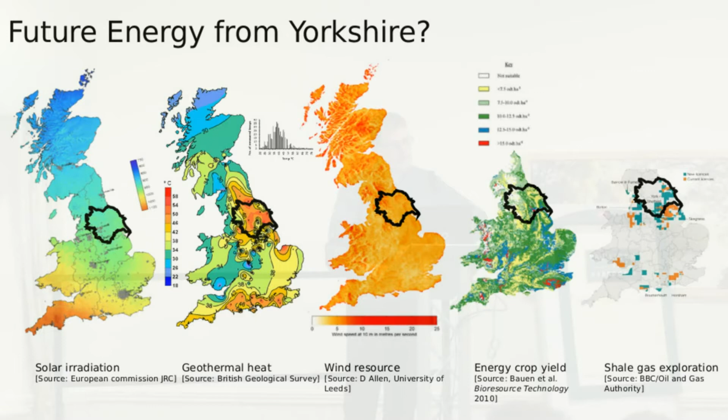And then perhaps the more controversial issue of the evening is going to be talking about shale gas, because we have significant, or potentially have significant, shale gas resources in the region. Whichever energy source you prefer, it's certain that someone disagrees with you. So this slide is there to illustrate that whatever you choose, it's going to upset someone.

We're going to talk about energy in relation to Yorkshire - that's the theme of this evening. But when it comes to wind, just be aware that that is a national resource.

In the UK, we have more offshore wind installed capacity than any other country globally. We've got about 5 gigawatts at the moment. Germany keeps threatening to overtake us, they're not quite there. We're world leaders in terms of offshore wind, and why is that? Because we've got this great asset called the North Sea.

I'm going to talk specifically about wind energy tonight, and so we better talk about, for those of you who haven't been involved in the industry, what a modern wind turbine is. So here is my attempt in one slide.

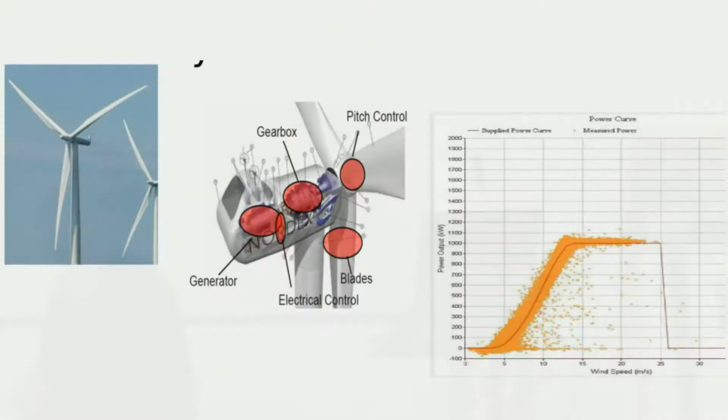How does it work then? Basically they all have a power curve like this. This is a 1 megawatt turbine, power here on this axis. This is wind speed, 10 metres a second, 15 metres a second. At low wind speeds, you need to get up to about 5 metres a second before the turbine starts to do anything. It then starts to generate, producing increasing amounts of electrical output power up until about 13 metres a second, and then you start pitching the blades, turning them to restrict the amount of power it produces to keep it at a megawatt, so that you don't overstress the whole system.

And that's okay up to wind speeds of about 25 metres a second. Once you get beyond that, the loads on the structure are getting so great that you really don't want the blades going around at all. So you pitch them so that it's generating no power, and it sits there and weathers the storm out.

If you add up everything, all the wind, all the gas, all the nuclears, you've got about 80 gigawatts of electric power generating plant in the UK at the moment. Peak demand is something around 45 gigawatts typically within a day.

Okay, how much of that could we generate from wind? Well, there's about 8 gigawatts of onshore and 5 gigawatts of offshore wind. That is set to rise massively in the next 5 to 10 years. And it's cheap. Already, you can generate electricity at £65 a megawatt hour from onshore wind turbines. That's typically the number. If you remember Hinkley C, when the government fixed the electricity price from that, £92.5, over a decade's time before anything's going to come out of that. So already onshore wind is about 2/3 of that cost.

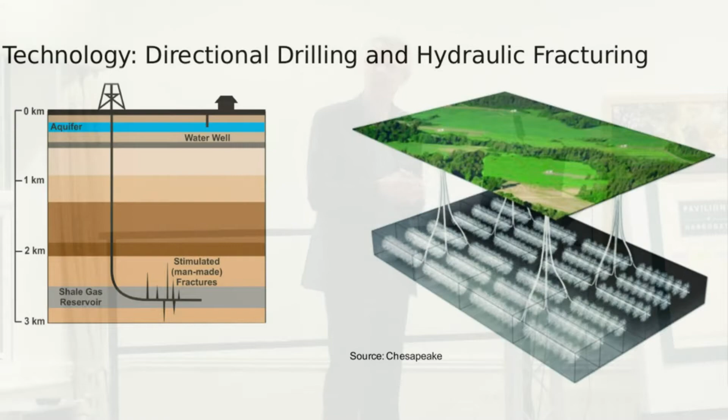The fracking technology has been around for a long time, at least since 1940. What this is, basically, is injecting high pressure water with sand and some chemicals in order to create little fractures and increase the permeability, the rate at which gas or oil can be produced from these wells.

The real breakthrough has been applying this with directional drilling, and that's really the key thing. Not to scale here, but these wells typically go at least 1 kilometre, typically 2 or 3 kilometres underground, injecting the high pressure water and sand, and you are cracking the rock apart. The way it works best in the US, which is basically where all the action is, is to drill multiple wells from one site.

So that's what it looks like during the drilling process. There are water tanks here. A few million gallons of water are used for each frac. That has to come from somewhere.

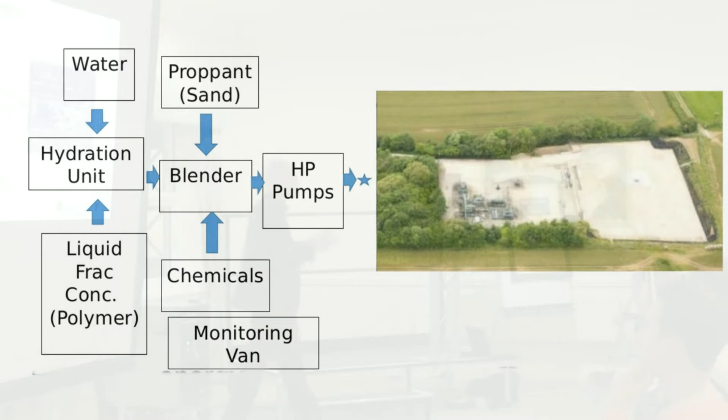Here in the UK, we might be able to pipe that in. In some places, it's stored. There's some polymer sometimes added. There are some chemicals, small amounts of biocide, for example. There is sand, because what the water does when you create those fractures, you want to prop the fractures open. You don't want them closing up, and they do close up actually quite quickly, which is quite a big issue.

So that's actually what it looks like, and of course you need a lot of pumps, so you need some pretty meaty pumps in here in order to pressurise that water. So then they need to be on site for the appropriate period of time.

How long does it take to drill one of these wells? Maybe something like 6 months. If you're going to drill multiple wells from one site, so 6 wells, that might be 2 or 3 years. So that's the kind of time period you're talking about for drilling. And of course, that's the great thing about fossil fuels: the energy density is so high, so the surface footprint for the amount of energy you get is extremely small.

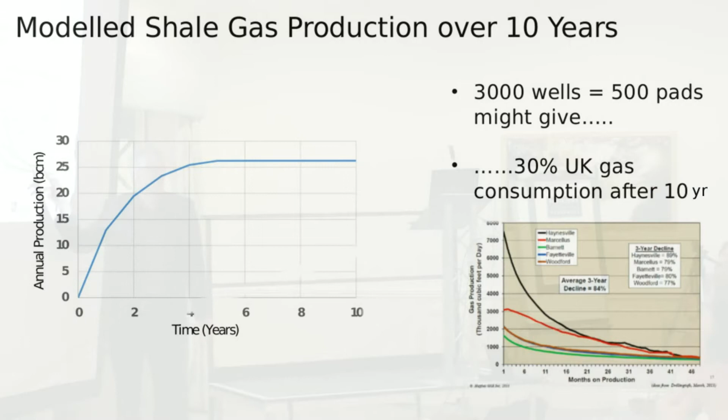These are the kind of production profiles you've got. You can't read this, but this is from 1 to, I think, 48 months, so this is the 4-year production. The issue with these wells is that the rate of gas production declined very, very quickly - after 3 years, you've lost about 80% of your production rate. Economically, that means the companies have got to keep on drilling.

So if we drill 3,000 decent US wells over a 10-year period, and I've suggested maybe that would be 6 per pad, so 500 pads, 500 football fields, that's what it would look like at the end. And if they work like decent US wells, not the best, not the worst, but sort of decent ones, after 10 years that would equate to about 30% of our annual consumption of gas. So that's the kind of potential prize which is actually out there.

We've gone from self-sufficiency to 80% import over about a 15-year period. So this could replace some of it if it works and we go on to that kind of scale. So those are the numbers, those are the issues that we need to talk about.

Biomass? Well, actually biomass covers a really wide range of materials. Essentially all biomass is either living or recently living matter on the surface of the earth. So that mainly includes, in terms of what we use as an energy resource, mainly wood, but of course it also includes other materials such as agricultural residues like straw.

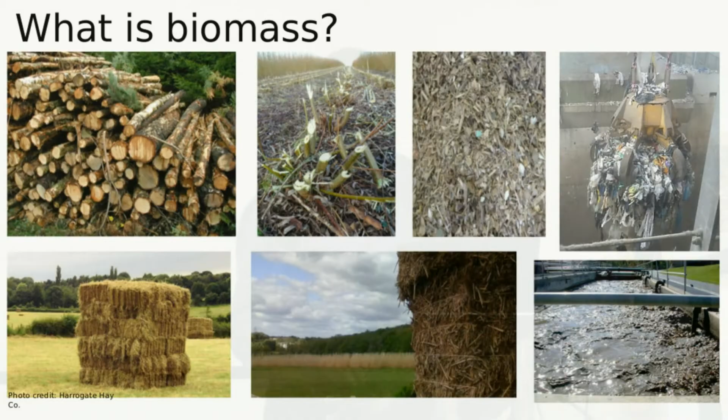There's also materials which are grown specifically for energy purposes, such as miscanthus and willow. But a lot of the stuff we generate as waste materials is also biomass - waste wood, municipal solid waste, which is substantially biomass but also has plastics and petroleum products in it. And sewage sludge is another waste product that's a resource for generating electricity.

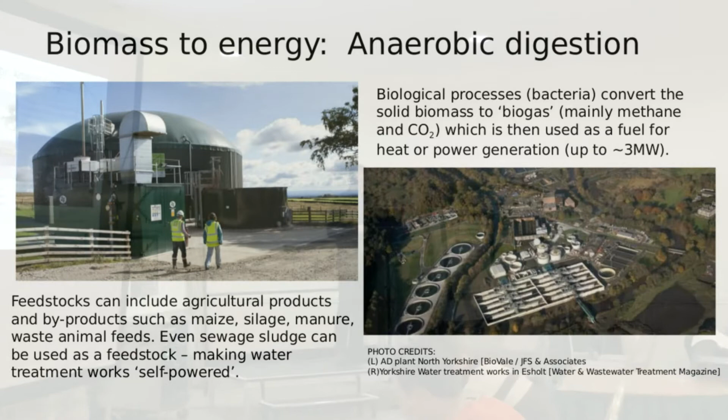So how do we convert biomass into electricity or harness the energy? There's a number of ways. Anaerobic digestion is a commonly implemented means of converting biomass into a usable fuel, using waste materials like agricultural waste, sewage sludge, manure from the farm, waste animal feeds and so forth. In recent years, anaerobic digestion plants have become popular.

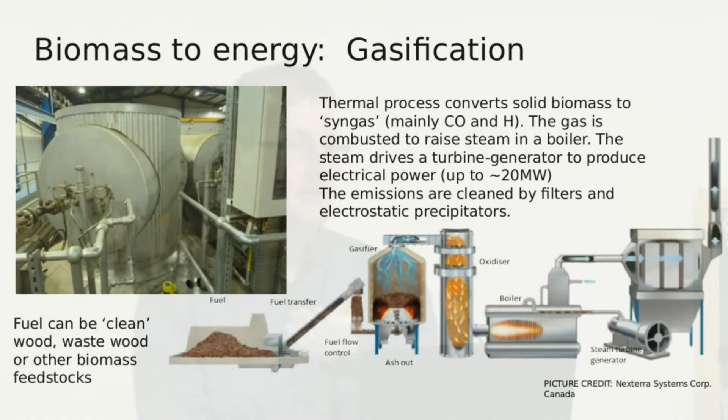Another thing you can do is heat up your biomass in an oven in the absence of oxygen, which converts the material into a different sort of gas - similar to syngas, so carbon monoxide and hydrogen. This is similar to how town gas used to be made from coal in the olden days, before we had natural gas distributed.

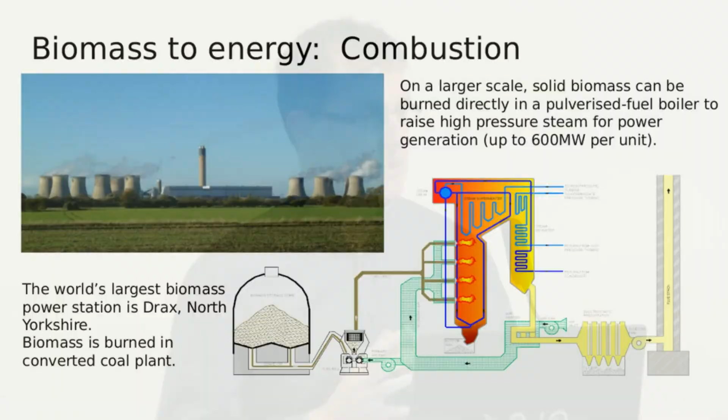And then the really big stuff - you might recognise this picture, it's a power station I mentioned earlier. This is Drax Power Station, the largest in the country, in North Yorkshire. Drax consists of 6 units, each 660 megawatts, so its total capacity is 4 gigawatts.

Large power stations like Drax, Ferrybridge, Ratcliffe and Cottam were built by the CEGB in the 60s and early 70s, based on very similar designs - they were based on burning pulverized coal. To convert them to biomass, they took wood or other biomass, milled it into a pulverized fuel, a fine powder, and put it through the burners in the same way they do with coal.

Why burn biomass? Why not just rely on wind energy? Biomass is essentially a renewable resource - that doesn't mean it's carbon neutral, and it doesn't mean it's instantaneously renewable, but the point is it is renewable. Burning biomass instead of coal is advantageous because it offsets putting carbon that's buried in the ground as fossil fuels into the atmosphere. The carbon emitted when you burn wood does convert to CO2 among other things, but the principle is that the carbon dioxide released is captured in regrowth of the resource you're using.

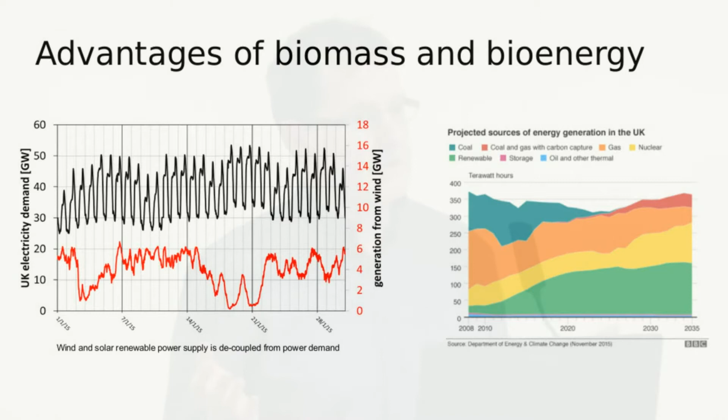If we're using this in the same way as we use coal at the moment, we can use it on demand - the power output from these power stations can be controlled according to what demand is. This graph shows two things: the UK electricity demand in black, which is basically a daily cycle, almost like a sine wave. The red line underneath is generation from wind, and there's no correlation between when the wind blows and when you actually need the energy. The point about conventional power fired by biomass is that you can switch that power on when you need it.

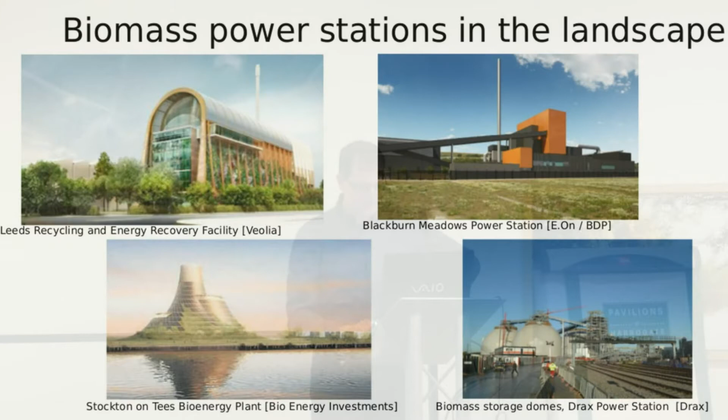What will these look like in the landscape? I've put this slide up to show that power stations don't have to be the brutalist architecture of the past. The one top left is the recycling and energy recovery facility in Leeds, run by Veolia, quite a pleasant looking building with a garden growing up one side. The orange building is in Blackburn Meadows in Rotherham. There's also an artist's impression of a bioenergy plant on Teesside bottom left, and bottom right are the biomass storage domes at Drax. So the architecture of these buildings doesn't have to be as brutal as it was in the past.

That's almost entirely Drax. Where did they come from? They come from North America.

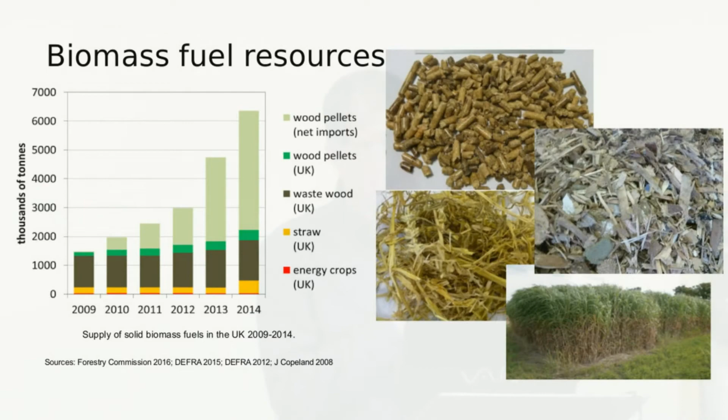But contrary to what may be claimed in recent reports, the supply chain and the means of resourcing those wood pellets from North America is, at least ostensibly, sustainable.

So as Patrick said, I'm going to talk about small-scale heat and power. These are technologies that any one of us in the room could be owners and operators of energy infrastructure. As opposed to the three speakers we've had previously, who talked about centralised, large-scale energy infrastructure, we're going to talk about anything that could be implemented at the domestic or community level.

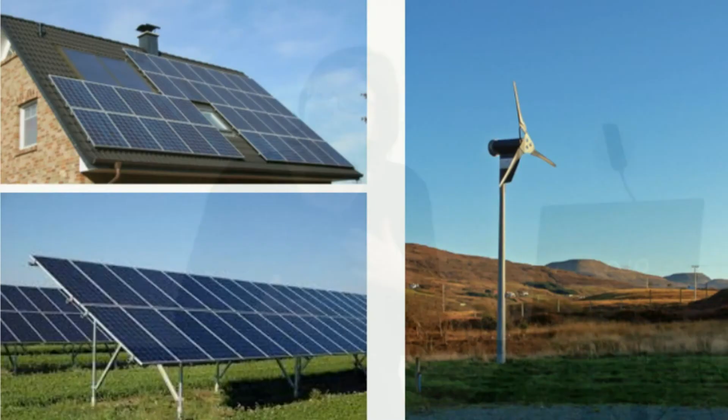On the electricity side, we've got solar panels, either roof-mounted, or now tiles that can be integrated into roofs. Or at a slightly larger level, a community-owned solar farm. At the household scale, you're looking at 4 kilowatt peak systems, and it can also be large community-owned schemes. Wind turbines, but much smaller than the type Simon was talking about, so micro scale here, either roof-mounted, around 1 to 2 kilowatts, or pole-mounted, like the example there, with around 5 to 6 kilowatts.

We shouldn't forget heat. When we think about changing our energy systems, we always think about what can be done on the electricity side, but heat accounts for more than 40% of our energy use in the UK, and also 30% of our greenhouse gas emissions. So if you want to think about a transition of energy systems, we have to think about heat as well.

We do have options for small-scale technologies that offer us heat. We've got solar thermal, similar to solar PV, but here we're heating hot water for use in the house instead of making electricity. In the middle there, that's actually a wood burning stove, but we can also think about biomass boilers, or systems that help us heat our homes, such as ground source heat pumps and air source heat pumps.

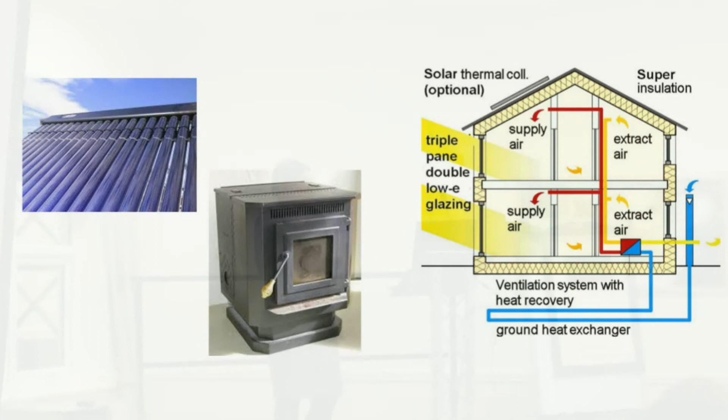So we can start to integrate these into systems in our households, as well as thinking about energy efficiency measures. I thought it'd be worth showing some of the costs and benefits of these technologies. This data I've taken from the Energy Saving Trust.

I've got some data here on costs for different types of systems, and you can see there's always a range. That range is going to be dependent on the size of the system you're able to implement, which relates to things like the size of your roof, or how much space you have if you're intending to put in a heat pump.

Also, the variation depends on what heat source you might be moving from. For example, you'll save a lot more money with a ground source heat pump if you're moving away from electric or coal heating. But if you're moving from a gas central heating system, you'll save less money because gas is quite an economical way of heating your home.

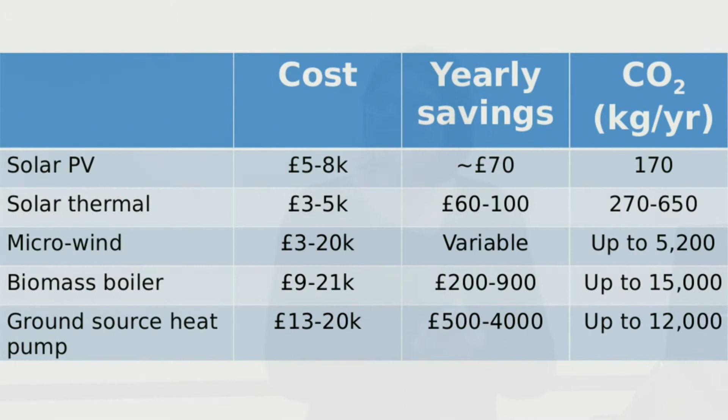We've got some savings costs here, and those numbers add up to payback periods where you're looking at maybe 20 years to regain your investment. But usually if technologies hit around the 10-year mark payback period, that's reasonable. I've also shown here some of the CO2 savings.

I wanted to show this scenario as a particularly optimistic one for what our energy system could look like if we really went for decentralised energy technologies in a big way. This is research from a consortium called Realising Transition Pathways, who were looking at different scenarios for our future energy system.

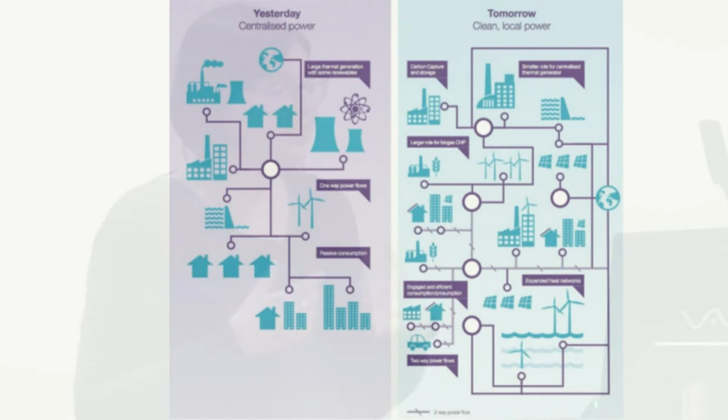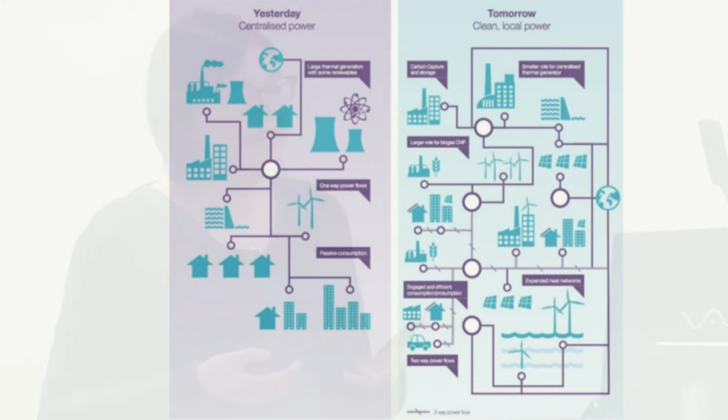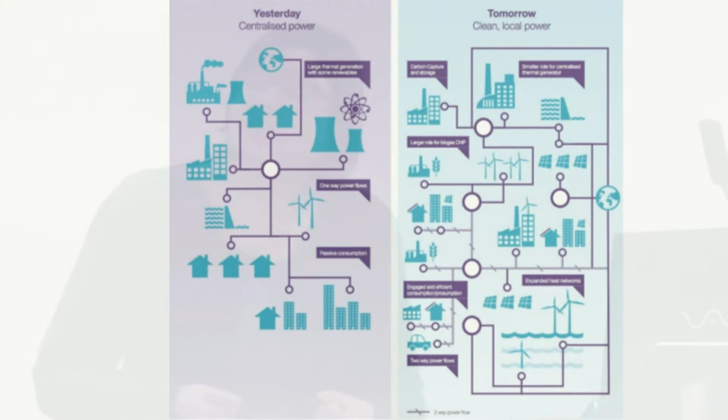They outlined a scenario called the 1,000 Flowers Pathway, characterised by a much greater role for civil society — not only domestic energy infrastructure and community, but also local authority-led investment in small-scale renewable technologies. Running their scenarios based on this massive uptake in civic society-owned energy, they found that perhaps 50% of final electricity demand could be met using distributed generation by 2050.

As I say, I think this is fairly optimistic, but it does make you think about what that transition would mean. In order for us to do that, we would have to radically rethink our energy markets, we'd have new actors in the system, and we'd have to think about new governance and policy to manage that. We would have to have supporting technologies, energy storage technologies, smart grids, these kinds of things.

What I hope to have shown is that if we think about small-scale technologies not just as providing energy—which we might see more of, but it's always going to be limited—but if we start to think about the other benefits we can accrue by taking a different approach to energy provision, by bringing in new local actors and doing things a bit differently, we might start to see more opportunities: lower bills, reduced carbon emissions, community cohesion.

I've actually got three questions. I'll do it in reverse order, starting with Catherine.

Have you considered—you talked about solar PV and solar thermal, but you didn't mention the integrated solar PV and solar thermal units that are available, which give you both from the same unit without doubling the capital cost, and improve the efficiency of the PV electrical generation by keeping the temperature controlled. One of the firms that makes them is in County Durham.